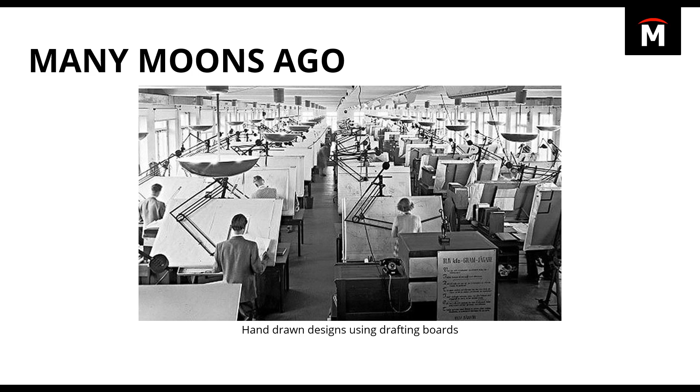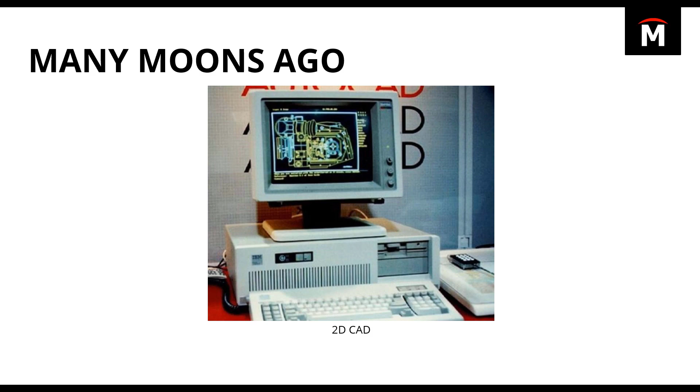Taking us back many, many moons ago, some of you guys may know this, some of you may not, but designs were actually hand-drawn on drafting boards. Then, with great technological advancements and the introduction of personal computing, came 2D computer-aided design capabilities. This was a huge leap forward in advancements. Then eventually bringing us to where we are today with very powerful 3D CAD capabilities.

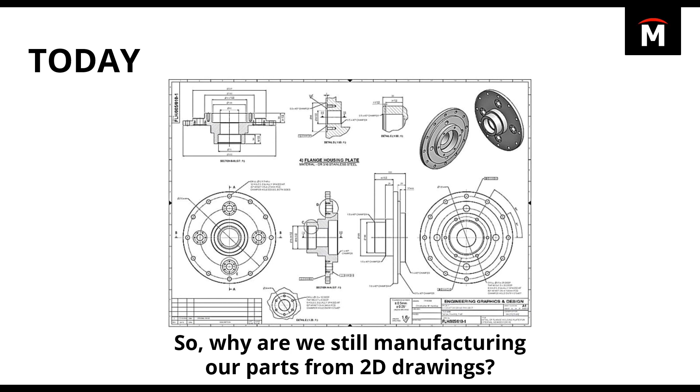And 2D drawings. So why are we inputting all of our data into these rich 3D CAD models and then stepping backwards to represent and condense all that information into 2D drawings for manufacturing? With very intricate designs and views, this information can certainly be difficult to understand and extremely easy to misinterpret, leaving a lot of ambiguity up in the air as to how a part or an assembly is to be manufactured. Additionally, updating drawings every time you make a change or a revision can be very time-consuming. So why are we still manufacturing our parts from 2D drawings?

Well, that's where SOLIDWORKS MBD comes into play. MBD stands for Model-Based Definition, and it allows you to define, organize, and publish your product manufacturing information, also known as PMI, all within your 3D model and in accordance with industry standards. With SOLIDWORKS MBD, you no longer have to worry about any fake dimensions or maybe your models not matching your drawings because all the PMI is driven and represented right there in those 3D models.

Like you can see here on my screen. Now, one major misconception that I actually hear a lot about when discussing MBD is the argument drawingless versus paperless. Let's just start here. These are not the same thing. Drawings are a presentation style, whereas paper is a type of communication form.

MBD is a drawingless manufacturing solution, as it allows you to publish your 3D PMI in a couple different formats, one being 3D PDFs and the other being eDrawings. 3D PDFs can be printed as paper copies. So by implementing MBD, it doesn't mean that you have to go paperless. I know there's certainly several situations where paper copies can be more useful than digital devices. But by going drawingless, it's one less document per part and assembly that you have to maintain and update, since all the PMI automatically updates within your 3D model with SOLIDWORKS MBD.

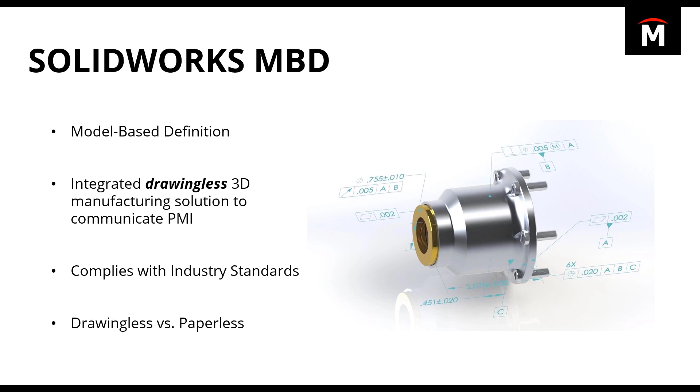Due to time constraints, we aren't going to be able to touch on everything inside SOLIDWORKS MBD, but to give you an outline of what we're covering today: first, we'll look at creating 3D annotations and organizing those - this is where most of the legwork and the important parts are. Then we'll look at capturing and setting up 3D views for those annotations. Finally, we'll examine publishing this 3D PMI into 3D PDFs and eDrawing file formats for those not working with SOLIDWORKS. Let's get started.

Switching over to SOLIDWORKS, we're going to work with a simple mounting bracket today to examine SOLIDWORKS MBD. Just like anything else in SOLIDWORKS, there are multiple ways to achieve similar or the same results. We'll focus on this first option for creating and generating PMI onto our 3D model by leveraging the data we've already inputted by creating this model and its features.

This is where the most legwork comes into play - actually going ahead and creating and annotating our model. SOLIDWORKS stores all the information related to your design right here in the Annotations folder. Inside here, you'll notice SOLIDWORKS has automatically gone ahead and created some views based on how this part was constructed.

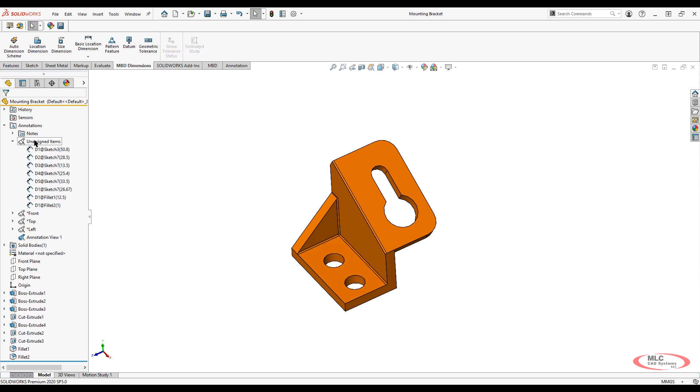We can go ahead and start moving these dimensions on over. We'll select them all from in the graphics area and move them to our new view. Now that they're all moved over to our new view here, we can go ahead and rename it - since SOLIDWORKS just gives it a basic name, we can call it AUX, standing for Auxiliary View.

From here, we could take a look at reorganizing that. Since we're leveraging the data we've already inputted, it might just take some cleanup work, just like cleaning up a 2D drawing. So we could go ahead and drag these out accordingly.

I know that this 12.5 millimeter radius should actually be calling out the top and the bottom fillet there. So if we need, we can always go ahead and easily make a change to accommodate for that, and I think that looks pretty good for this view.

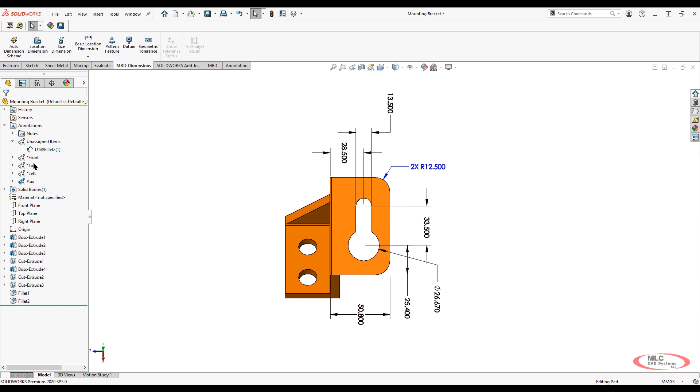Let's take a look at some of the other views that SOLIDWORKS has automatically gone ahead and stored information for, based on how we created our model. Again, maybe just some minor cleanup - but all this information we've already inputted into our model is stored within our 3D model, making it really easy to create this PMI and show that right on top of our 3D model.

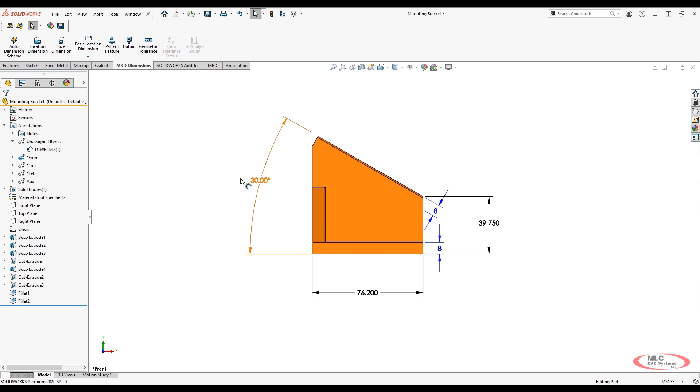We could continue to take a look at some of the other viewports here, just do some minor cleanup work. Maybe we'll notice that there are some additional dimensions we could easily add in, and that's just as easy as bringing in some smart dimensions, just like a 2D drawing. We go ahead and select the edge, and now we're controlling that whole location in regards to that front edge there.

Now you may notice here we have some difference in colors for our dimensions, and that's based on how they were actually created. Those black dimensions are sketch dimensions, the blue dimensions are feature dimensions, and that new dimension we created in gray is actually a reference dimension. SOLIDWORKS is smart enough to store all that information right there in your model.

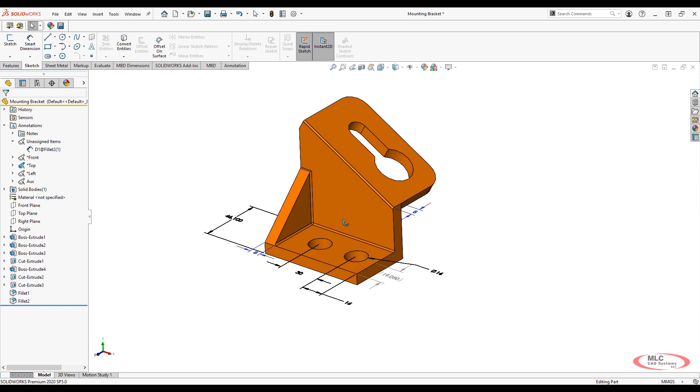So taking a look here, we could easily go ahead and take a look at all the information that's been stored as PMI into our model by just showing all of our viewports. This is a great way to leverage all the data we've already inputted into our design, so we don't have to go ahead and recreate those annotations.

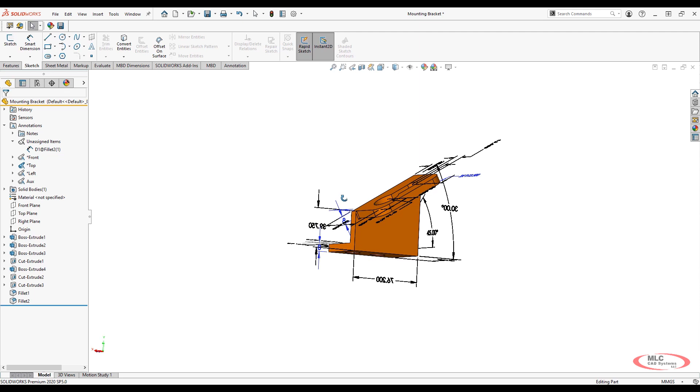We can see here how this part was created with way less ambiguity compared to a 2D drawing. We can rotate our model and see exactly where a dimension is actually being pulled from, rather than a black and white 2D drawing which may be very confusing. This is a great way to leverage the data we've already inputted into our model and get a feel for setting up our PMI.

However, this doesn't actually take full advantage of the capabilities of SOLIDWORKS MBD. In order to do that, we want to go ahead and access the MBD tab from the command manager, where you'll see all the specific commands related to creating model-based definitions.

Now, the second option we're going to take a look at for generating and displaying this PMI information onto our model is by making use of the DimXpert tool. The DimXpert tool is actually available with every seat of SOLIDWORKS.

However, in regards to what is specifically related to SOLIDWORKS MBD, anything to the right of where my cursor is—the import scheme, all the way to adding surface finishes, weld symbols, capturing 3D views, creating specific section views, model break views, and publishing your 3D PMI—is all specific to SOLIDWORKS MBD. So in order to access this, you do have to have that license.

However, if you are just looking to create PMI onto your model, any seat of SOLIDWORKS has that capability with the second option here that we're going to be using.

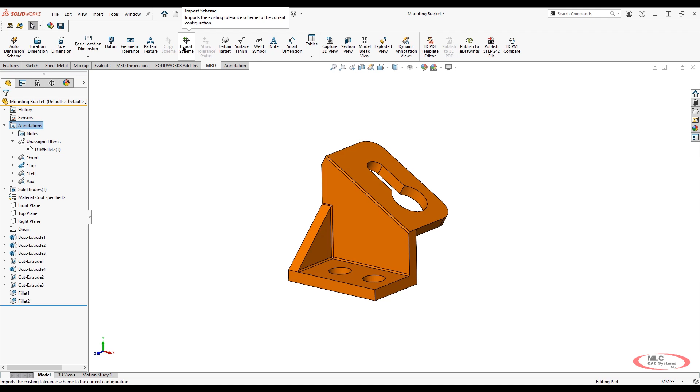Since we've already taken a look at manually creating a couple dimensions in our first option, we're actually going to focus on the ability to create an auto dimension scheme, which will essentially automatically dimension and tolerance our part based on the manufacturing topology found in the model. SOLIDWORKS will go ahead and apply the appropriate annotations based on ASME or ISO standards.

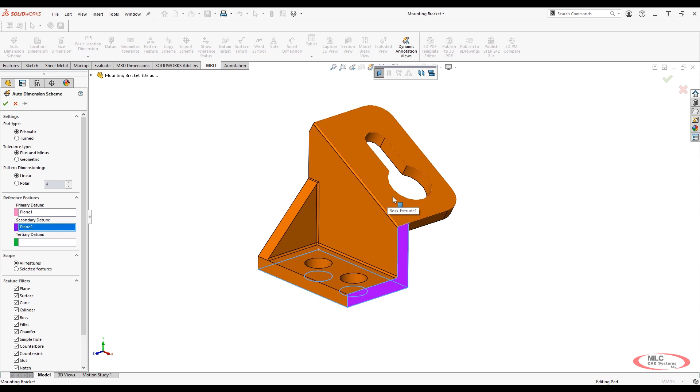So applying an auto dimension scheme here, we can see that SOLIDWORKS gives us the option to define a primary, secondary, and tertiary datum. We don't have to define all of these if we don't want to, but for this instance we're going to have it try and create dimensions and tolerances for all of our features if possible. So we can go ahead and select those.

And then, like I mentioned, we're going to have SOLIDWORKS go ahead and create this for as many features as possible. But you do have the option to go ahead and select just selected features if you don't want it to select and create dimensions and tolerances for all the potential features there.

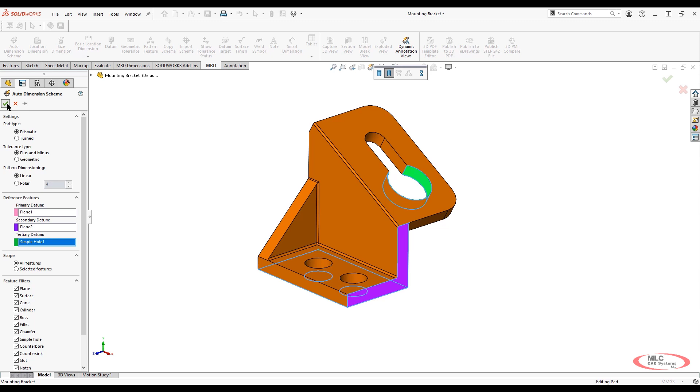When we go ahead and click OK, notice how SOLIDWORKS immediately gives us instantaneous feedback as to whether our part is fully, under, or over constrained. So just by looking at the colors here on our model that's been overlaid, we can tell if we have the appropriate amount of PMI to go ahead and manufacture this component safely.

So any of the faces shown here in yellow are actually under constrained. The ones shown in green are fully constrained. And if we had any red faces, which it doesn't look like we do, those would be over-constrained.

And if we did actually have an over-constrained face, SOLIDWORKS would go ahead and notify us, giving us a warning, letting us know that we've got an over-constrained face here, or a feature.

So just by taking a look at our model here, we can easily tell that we do need to go ahead and manually input some additional dimensions to make sure that our part is fully constrained, making sure that we can manufacture this properly.

Also, one thing to point out: the difference between creating dimensions with the DimXpert versus just leveraging your data that you've already inputted into your models by creating those features is the ability to cross dynamically highlight your model here.

So when we go ahead and click on a dimension, one of the PMI dimensions there, we can see that it automatically highlights the face of that feature it is pointing out in regards to. This removes any ambiguity that you might have on a 2D drawing where you don't know where that dimension is actually being called out to. We selected the 57.96 dimension there.

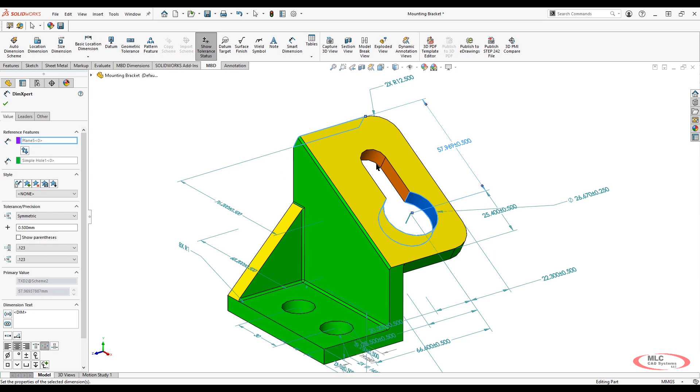We can see that it's going to the center of this keyhole and all the way up to that rear face. This is a great capability within SOLIDWORKS MBD. This is only available if you dimension your part using the DimXpert tools. This could be done either with the auto dimension scheme or manually.

One thing to note, now we can go ahead and take a look at applying some manual dimensions here to make sure we are fully constraining all of our faces and features. Let's take a look at maybe applying an angle dimension between our angled flanged face and our front face. When we do so, we can tell that's really the only dimension we needed to control that.

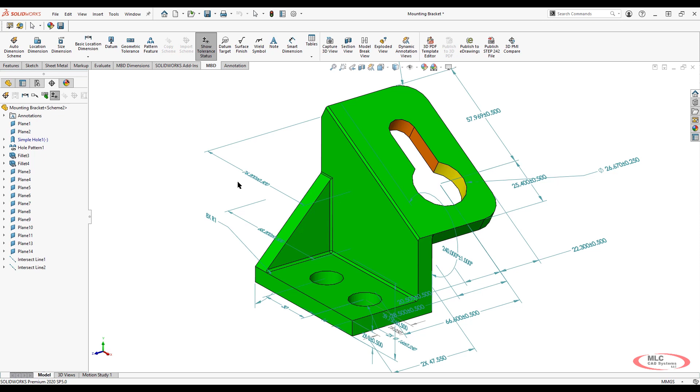We could go ahead and also apply an angle dimension here to control that face as well. And by using the show tolerance status, we can see that our part here is slowly becoming fully constrained.

Additionally, we could go ahead and add in some datum callouts to the primary, secondary, and tertiary datums that we went ahead and defined when creating this auto dimension scheme.

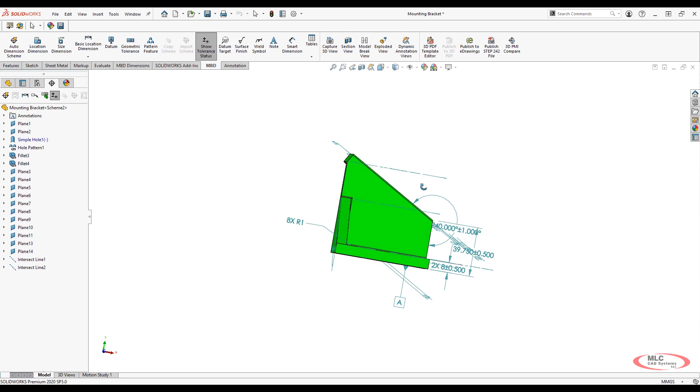Taking a look at our model, we can see for the most part it's almost all fully constrained. We're not going to focus in on making sure all the other components here, like this keyhole, are fully constrained. I think you guys know how you can go ahead and apply some dimensions, just like we did to control these two angle dimensions here.

So let's go ahead and take a look at how SOLIDWORKS has gone ahead and organized these annotations here for us.

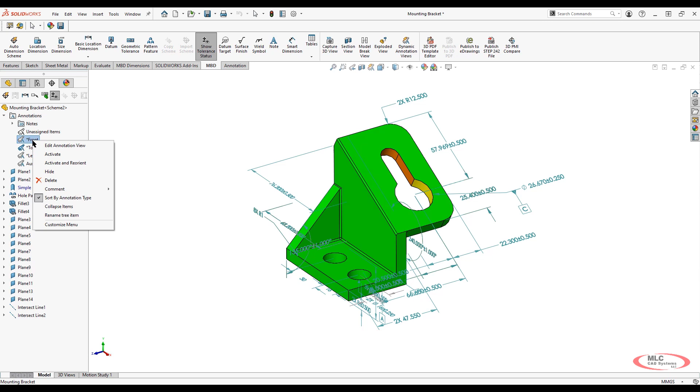Taking a look, we can just go ahead and activate and reorient our views here. For the most part, these look pretty good. They might need some minor cleanup work, but like I said, for the most part they're all looking pretty good.

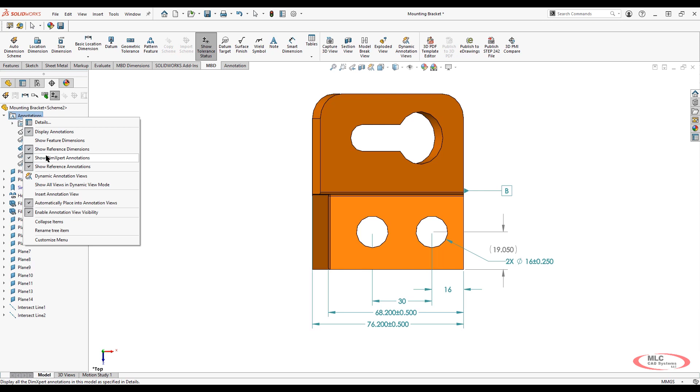Everything here looks good. How about our left view? Our left view, maybe we want to just drag that out a little bit. That looks good. And then let's actually take a look at our auxiliary view.

Our auxiliary view that we created earlier — notice how, since we already went ahead and created it, SOLIDWORKS found this and went ahead and associated that new PMI to this specific view. So we don't have to worry about finding this PMI in the unassigned items and relocating it, since we've already created a view perpendicular to this angled face here, giving us that auxiliary view we're looking for.

Now we may have some cleanup work, but that's quite all right. This saves us quite a bit of time by making use of the DimXpert.

Just like that, everything is looking pretty good with all the PMI that we've got so far. Now you may be wondering where we're getting these specific tolerances from. Like I mentioned earlier, since these are in accordance with industry standards, these are all being controlled from the document properties, just like a drawing.

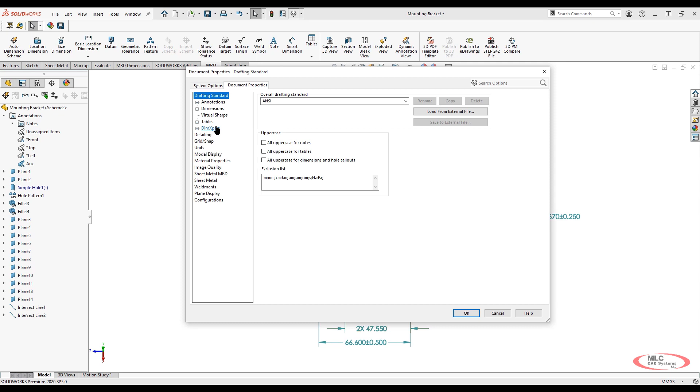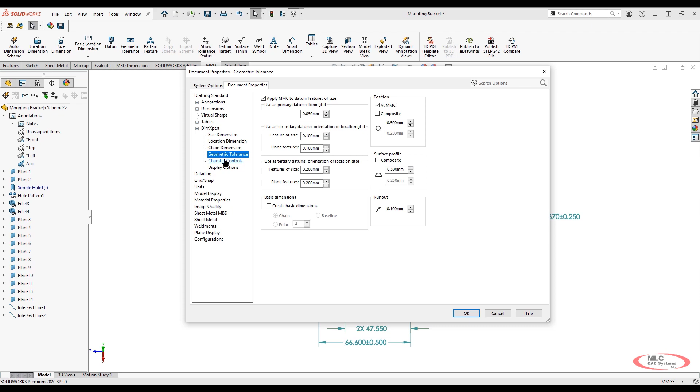Under the DimXpert, we can see we're actually using the ANSI standard, but we do have the ability to choose from ISO standards and much more to go ahead and control our tolerances here. You can actually see that we can apply tolerances based on specific features. And if we wanted some GD&T, we could also apply those as well.

Now I think we've got plenty of PMI. I think we're looking pretty good here. However, if having all this PMI on your screen is a little bit confusing to work with, and to see specifically where something is being called out to, you do have the ability to hide and show those all from the annotations folder, or we could make use of the dynamic annotations views.

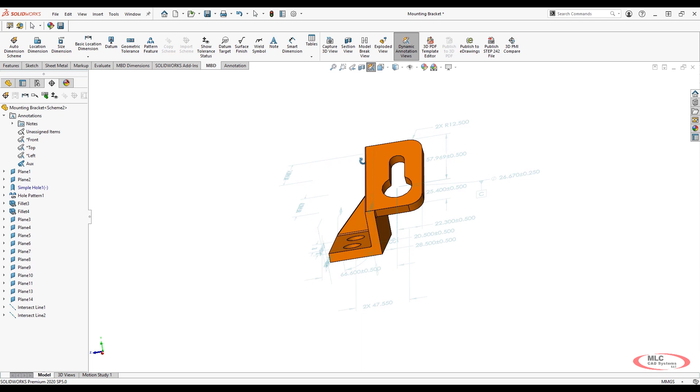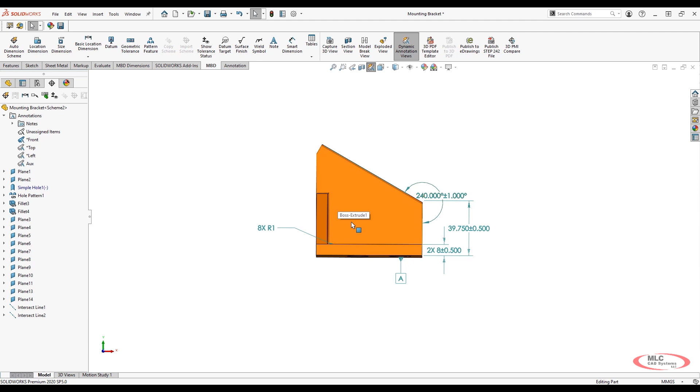When we go ahead and do that, SOLIDWORKS will automatically show a specific annotation view based on if we're within a certain couple degrees, if we're perpendicular to that face. So here, since we're almost perpendicular to this auxiliary view, SOLIDWORKS has gone ahead and unhid that view for us. But as we rotate here, notice how we don't see anything until we're pretty much perpendicular to a specific view.

Now we could go ahead and see those front view annotations there. Maybe taking a look as we rotate this, now we can see our top view annotations. So this is a great way if you want to go ahead and show all your annotations, but only be able to view those based on what specific annotation view you're oriented to.

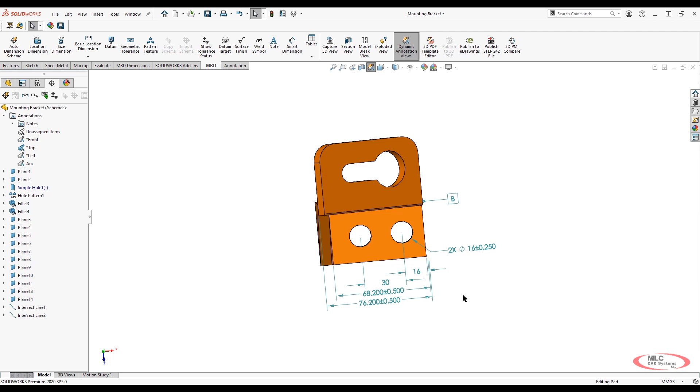Now that we've pretty much defined all of our PMI necessary to go ahead and create this component, the next part that you would want to take a look at is capturing some 3D views. But before we go ahead and capture some 3D views of this component, I do want to make a point that we have the ability to bring in notes.

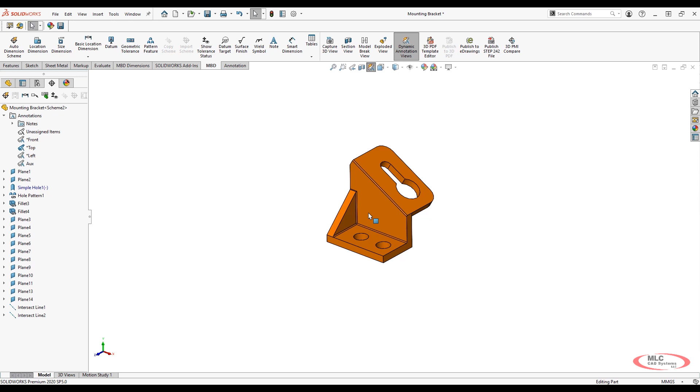So just like a drawing, maybe you've got part-specific notes, or you've got some standard company tolerance notes. Those can all be brought into this model and published as PMI. You could easily go in and add a new note if you wanted here. But if you've got some company standard notes that you apply to every drawing, you could make use of the design library to store that information.

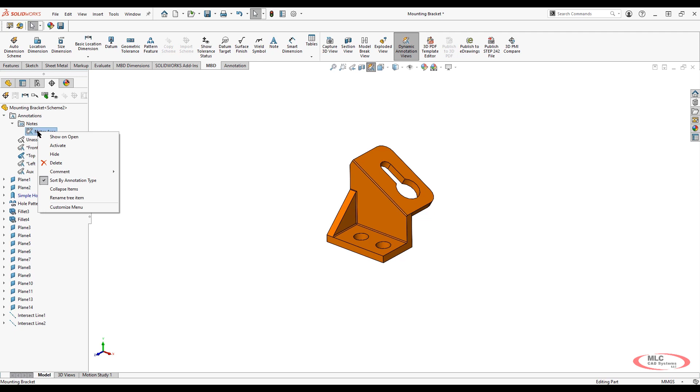You don't have to recreate those notes every single time. You could just store those and drag and drop them into your model. You just want to make sure that you have the notes area active. And when we do have the notes area active and we drag in a specific note, you'll notice that when we rotate our model, that note actually always stays flat to our screen, making it really easy for viewing purposes.

So maybe this is a company specific tolerance note that you want applied to every model. You can just go ahead and store that in your design library. The great thing about the design library is that it can also be shared with all of your colleagues, so you don't have to worry about duplicate data entry or someone fat-fingering a note. All this can be stored and created one time and shared with all your colleagues.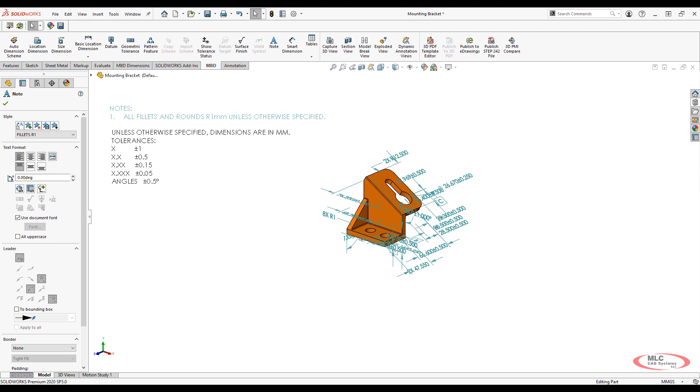Additionally, the design library can be stored for more things than just your notes. It can be stored for features, parts, and maybe even any sub-assemblies that you need. So we'll just go ahead and drag off another note here, making sure that all the fillets and rounds that aren't specified are 1 millimeter. So maybe that's a part specific note that you need. You can just go ahead and drag that into place. And know that when we take a look at our model, that is always flat to screen, and those are stored underneath the notes area there.

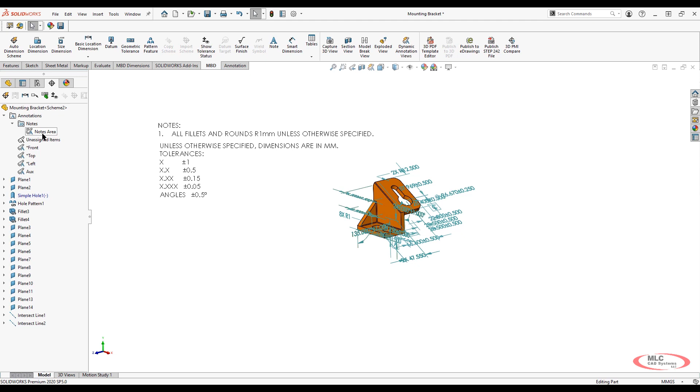So now that we've got all of our annotation information here, we can go ahead and take a look at creating and capturing those 3D views. Like I mentioned earlier, most of the legwork is actually just going to be involved in creating those annotations. So let's go ahead and orient and activate our model to that front view. We could zoom in, maybe adjust the callouts if we want them, adjust it a little bit here, and we could go ahead and capture our view.

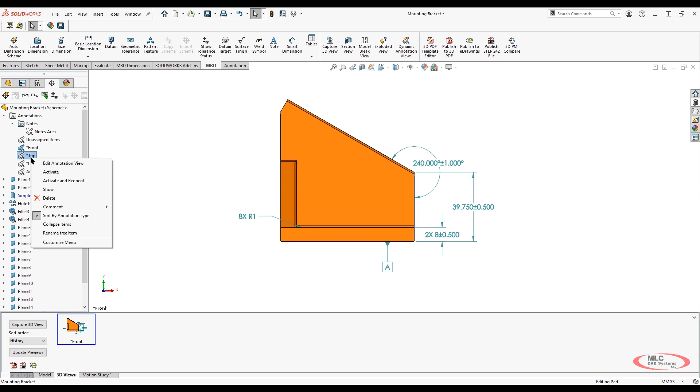When we do so, it'll automatically select whatever views are shown here, and we just want to capture the front view annotations. If this part was actually set up with multiple different configurations or display states, you can control those right here as well. So if you want a 3D view that's configuration specific, you have that ability. But since this component was just created with one configuration, we're just going to go ahead and take a look at creating some other 3D views.

So we can just keep working down the tree here for our other views, just capturing those. Pretty quick and easy this part is.

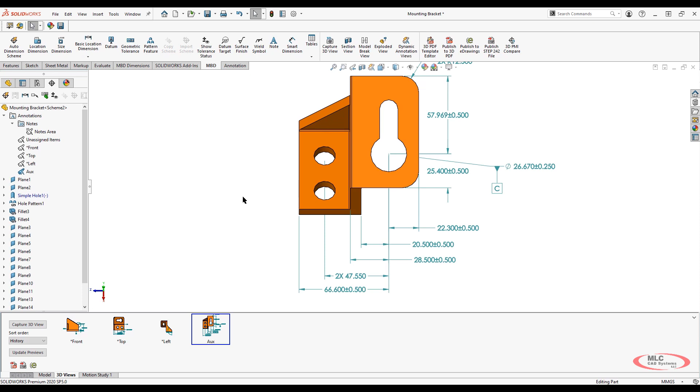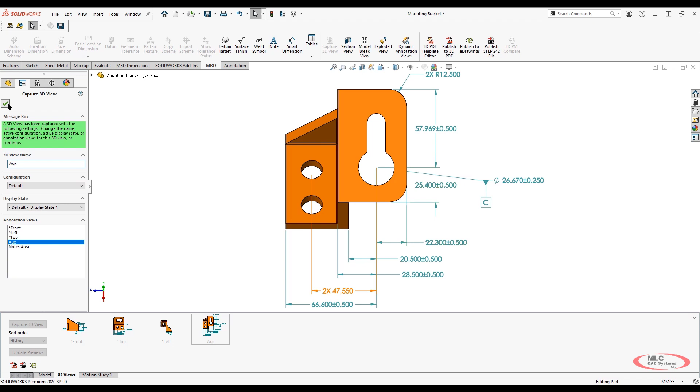Now, say we actually went ahead and captured this, maybe missing a dimension. I'll go ahead and take a look at that now. Say we're looking at all of our 3D views, we get to our auxiliary view and we say, oh man, you know what, I kind of cut off that fillet dimension there up at the top. Well, you can just easily go ahead and recapture a view by right-clicking on it, selecting the recapture option, and just clicking OK. So next time when we activate that auxiliary view, now we can see that fillet dimension is properly oriented inside our 3D view there.

So we can continue from here to maybe add some additional views. Maybe we want to show all of our dimensions here and our notes area, and we'll just capture this as one as well, and we'll just call this maybe ISO all.

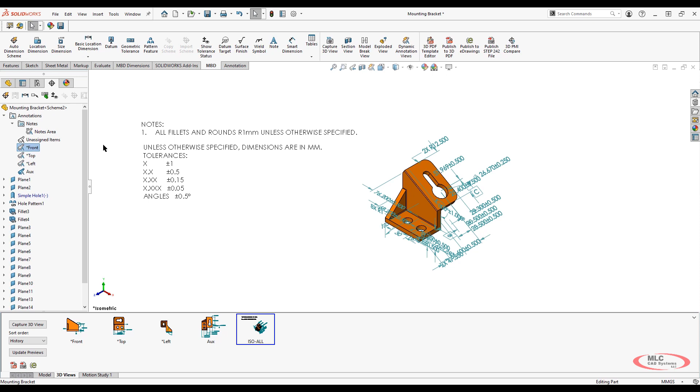And then if we want one with just our notes, we could go ahead and do that as well. So we're only showing our notes here. Let's go ahead and activate that and hide the rest of our annotations here. And now we've got an isometric view with just our notes area there.

Now, since we're working with just a pretty simple bracketry design here, we didn't really need any additional views other than our standard views and one auxiliary view. But do note that you do have the ability to go ahead and create section views, model break views, and even if you're working with an assembly, you can do exploded views as well.

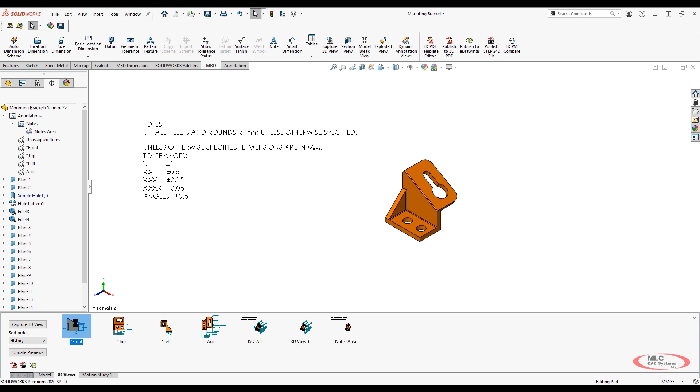So now that we've gone ahead and we've created our annotations and our PMI onto our model here, we've created and captured all these 3D views. If we had a colleague or a supplier, someone that was using SOLIDWORKS, we could go ahead and share this file to them. And as long as they have SOLIDWORKS MBD, they could go ahead and they could actually visualize these 3D views that we've set up here.

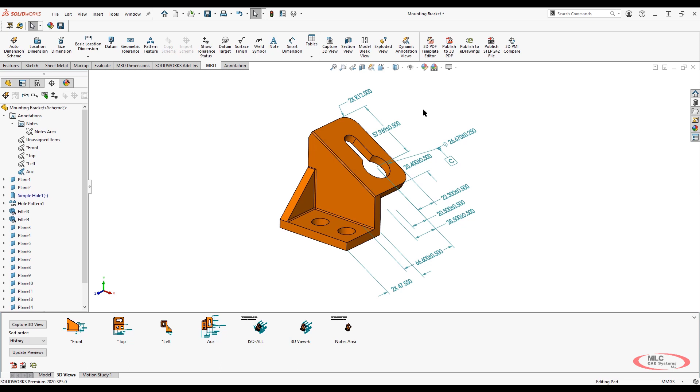If not, and they did have SOLIDWORKS, they'd be able to actually view this, but they wouldn't be able to go ahead and set up these 3D views that we have here. They could go ahead and they could still see the model and see those annotations and dynamically highlight where they are. But if they didn't have SOLIDWORKS, so maybe you're sending this to the shop floor and they work with eDrawings files, or maybe a supplier that is running a different program, well, that's when the ability to publish to 3D PDFs and publishing to eDrawings comes into play.

Now, both of these publishing options are free. 3D PDFs is free through Adobe Reader, and eDrawings is another free program as well.

Taking a look, we'll first start off by looking at the 3D PDF template editor. So we could go ahead and we can publish this information directly to the SOLIDWORKS templates that they come with, or you could go ahead and you can create your own customized template as well.

So this is very similar to a drawing, where you'll notice that the custom properties actually get brought over as well. So the part number, date, revision, so on and so forth, all the way to who it was drawn by, who it was checked by. You also notice that there's the ability to carry over notes. So the notes that we went ahead and we imported into our notes area, those will also get brought over into our 3D PDF here.

And then also we've got our viewport. So in here we'll have a main view, and then we'll see all of our 3D views that we created will be populated in these thumbnails down here below. One great thing about the 3D PDFs is that it's not a stationary 2D drawing view. You can actually go ahead and we can manipulate the model and rotate it within this viewport here.

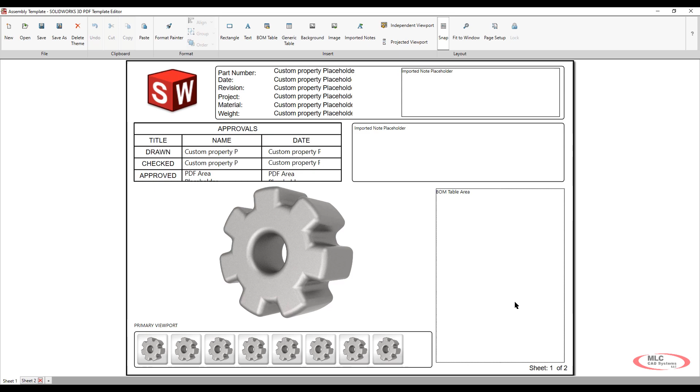You also have the ability to add a comments area. So maybe you're sending this to a supplier. They can go ahead and mark it up, add any comments, and send it right back to you.

So let's go ahead and let's take a look at publishing to a 3D PDF. Since we're working with a part, we'll just make sure we're working with a part template here.

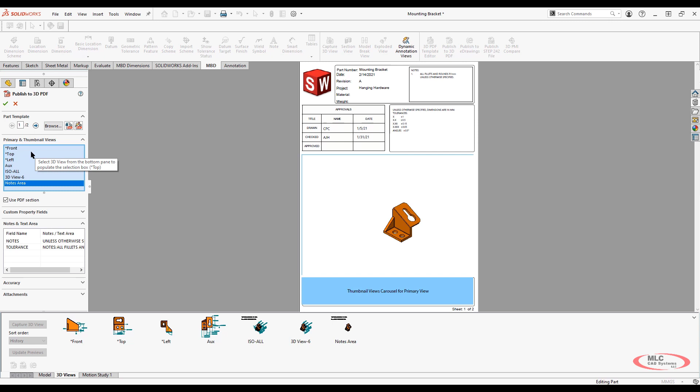And you'll immediately notice in the preview area, that our front view gets brought in, we could capture all of our 3D views that we created and bring those into the thumbnail area. And then maybe we want the front view to be our primary view to start.

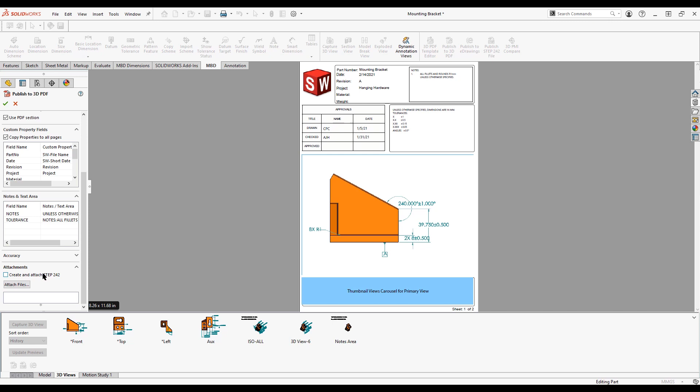Like I mentioned, we'll see that all the custom properties get brought over. Additionally, our notes that we have brought into our model also get carried over to this 3D PDF here. And then with both 3D PDFs and eDrawings, we have the ability to create and attach a STEP 242 file, which is an MBD specific step file that also contains all the PMI information on top of your model there.

So taking a look at one that I've already gone ahead and created here for us, we can see that sure enough, all the custom properties got brought over, all of our notes that we had applied into the graphics area got brought over as well.

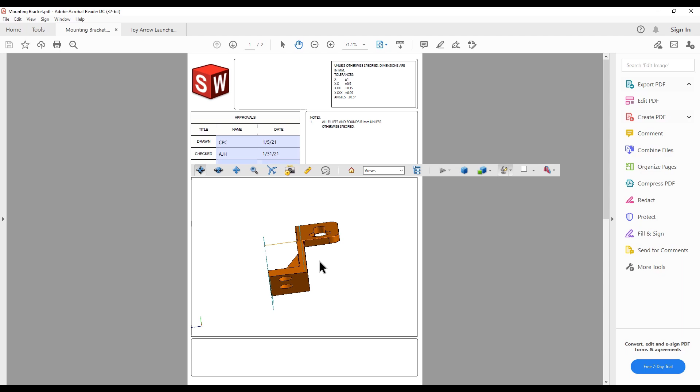You'll notice we have the ability to go ahead and rotate our model here within our 3D PDF, as if we were in SOLIDWORKS. We also have the ability to switch between our 3D views that we went ahead and saved here.

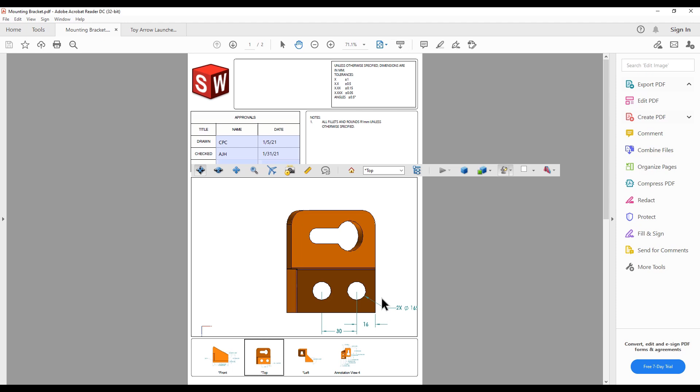A great thing about 3D PDFs is you also have the ability to go ahead and measure. So maybe if you really wanted to make sure a specific dimension was correct, you could double check and make sure that gap between the two holes is 30 millimeters. These are great ways to view your model-based definition, just removing any ambiguity you would normally have when creating a part from a 2D drawing. We could go ahead and select our dimension, and you'll notice it dynamically highlights in the model as well.

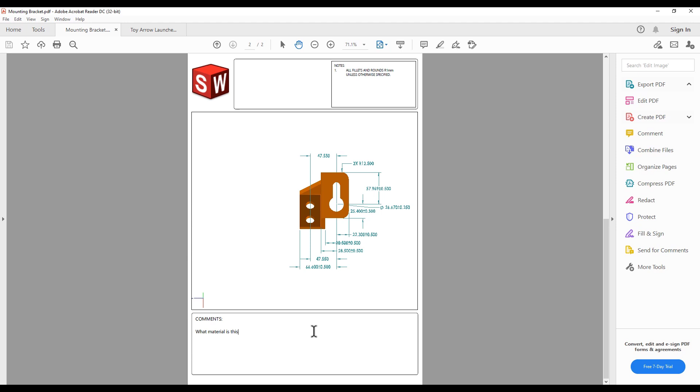Like I mentioned previously, if you're working with a supplier and they want it as a 3D PDF sent to them, they have the ability to mark this up with any comments they may have. Maybe they're wondering what material this is to be made out of. They could go ahead and save that and send it right back to us since we don't have a material called out here. Also, 3D PDFs have the ability to be printed, so switching over to SOLIDWORKS MBD doesn't mean you have to go paperless.

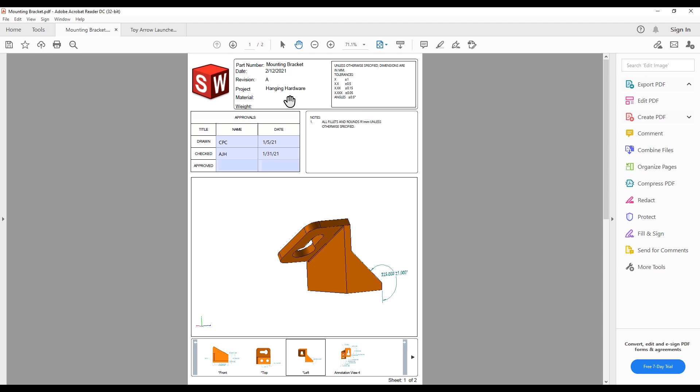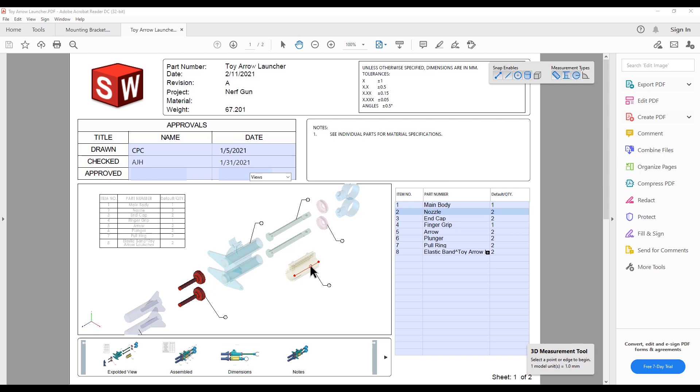Additionally, I have an assembly 3D PDF here, for example, just to show you the ability to dynamically cross-highlight between the bill of materials. Notice when I select that nozzle, it automatically highlights and actually changes the transparency of our other components that are not selected. Same thing here when working with selecting from the graphics area, you'll see we've automatically dynamically highlighted the finger grip there in the bill of materials.

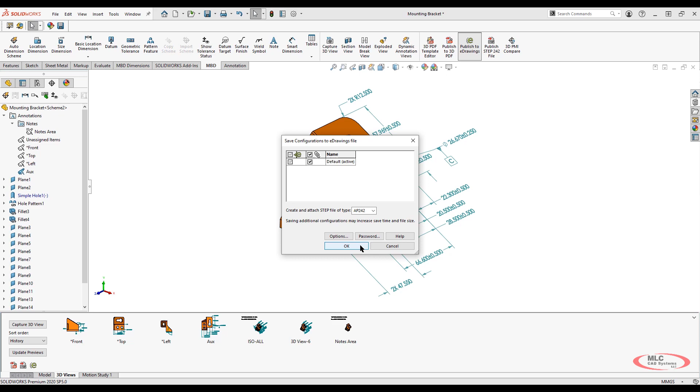Now, for those of you working with e-drawings, publishing the e-drawings is even easier. All you have to do is click the button, and then you have the ability to create that STEP 242 file there. When you click OK, it will automatically create that file. So in this instance, you don't even have to worry about adding in any of the notes or custom properties - those all automatically get brought over for us into our e-drawings file.

Just like our 3D PDF, we have the ability to go ahead and rotate this, removing any ambiguity, making sure we know where all of our dimensions are being called out to. Also, when we select a dimension, notice how it dynamically cross highlights in our graphics area, completely removing any ambiguity. So now we don't have to have our suppliers come back to us, maybe asking for specific dimensions or any clarity.

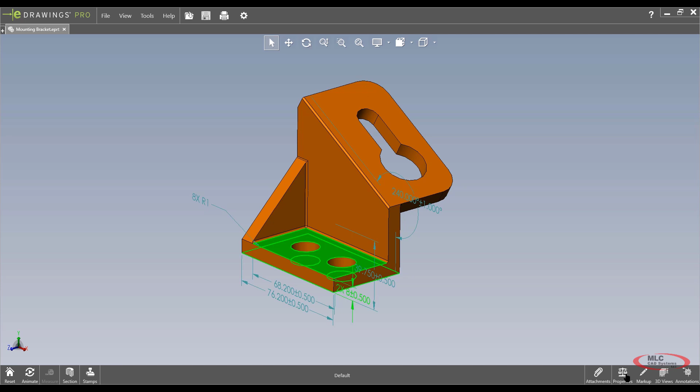They should be able to go ahead and figure out exactly where these dimensions are being called out to. Like I said, the custom properties also get brought over into our 3D e-drawings file, and our 3D views get brought over as well. So if we wanted to take a look at those specific orientations, we can, and this is a great way to do so. Also with e-drawings, you have the ability to mark it up, so very similar to 3D PDFs are e-drawings. It all depends on who you're working with and what you need to send these to if they don't have SOLIDWORKS MBD.

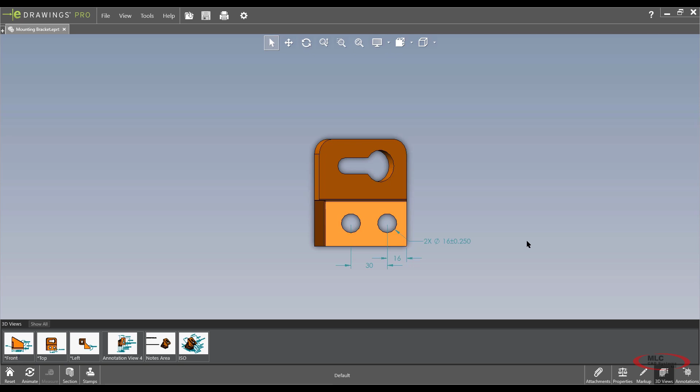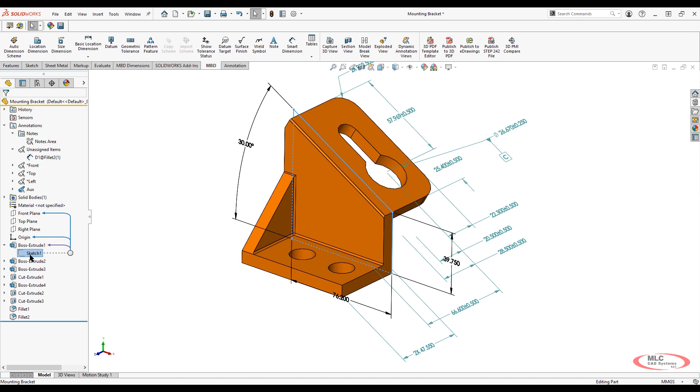Like I mentioned previously, since all this PMI is actually stored in the model, we don't have to worry about updating a drawing for a revision change if we make a change to our model. So let's take a look at changing a simple dimension here in our model. Maybe we wanted to change the width of this - it's currently called out to be 76.2 millimeters. Let's go ahead and just change that to 70.

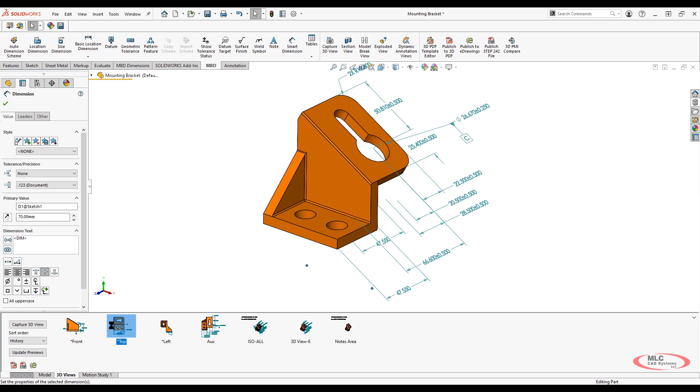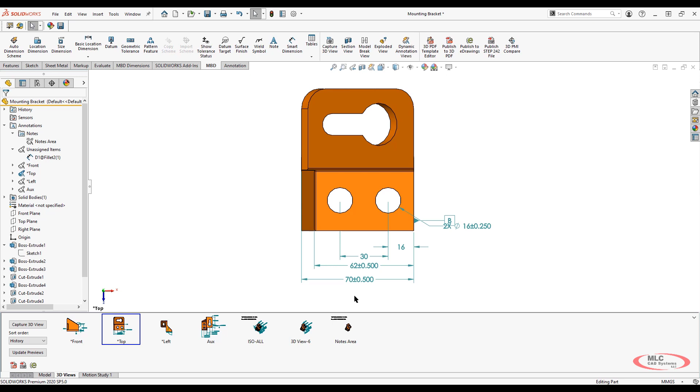You'll notice when I do so, and we switch over to our 3D views, I take a look at our top view here - notice how the PMI has automatically updated for that change. Since that PMI is stored in the model, we don't have to worry about updating another drawing, since all that is stored right here in the model. So making revisions or changes even easier for you. Hopefully that should save a lot of time and a lot of headaches associated to updating drawings.

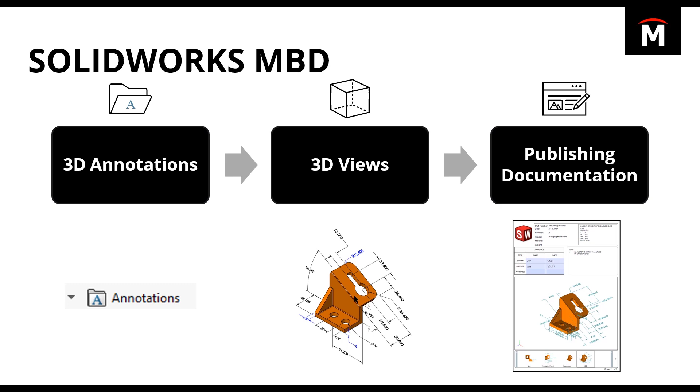So as you can see, SOLIDWORKS MBD provides easy to use tools to define, organize, and publish your product manufacturing information all inside your model to help streamline production, cut cycle times, and improve your product quality. I hope everyone enjoyed and found this overview of MBD to be very useful. Thank you.